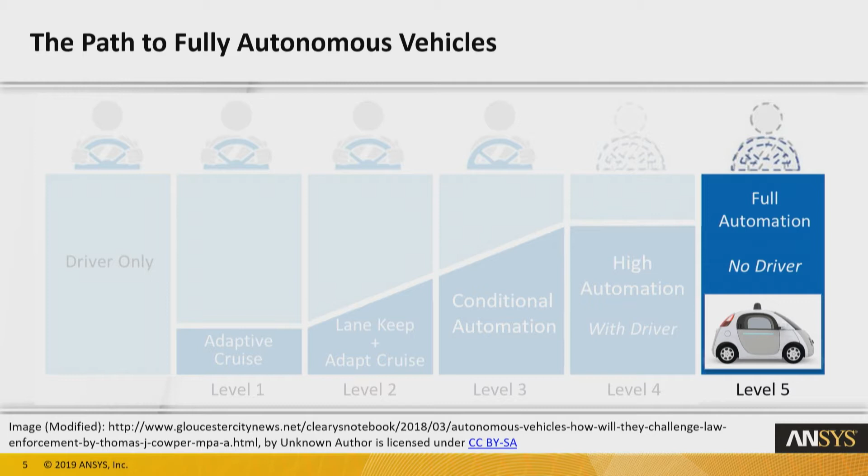Full automation with no driver is what I'm really going to be talking about today, okay? What do we need to do to get to this point? At this point, really, you could imagine having a coffee table in the middle of the car with 4 very comfortable seats, no driver. You say, I want to go to Toronto, get in the car and wait, and when you get there, you get out.

What do we need to do to make this a reality? To make it a reality that we don't need a driver in the vehicle? Well, what we need to do is understand what the driver does, all right? And the observation to be made here is that certainly there's an environment in which the autonomous vehicle is driving. That's a really important piece of the puzzle.

Then we get into a driver control loop. That driver control loop contains 3 main pieces. One related to perception: the autonomous vehicle needs to be able to assess what's going on around itself. The next main component is motion planning, so the vehicle needs to assess what's going on and decide what to do. And the last thing is that it needs to execute whatever it wants in terms of motion with the various systems in the vehicle.

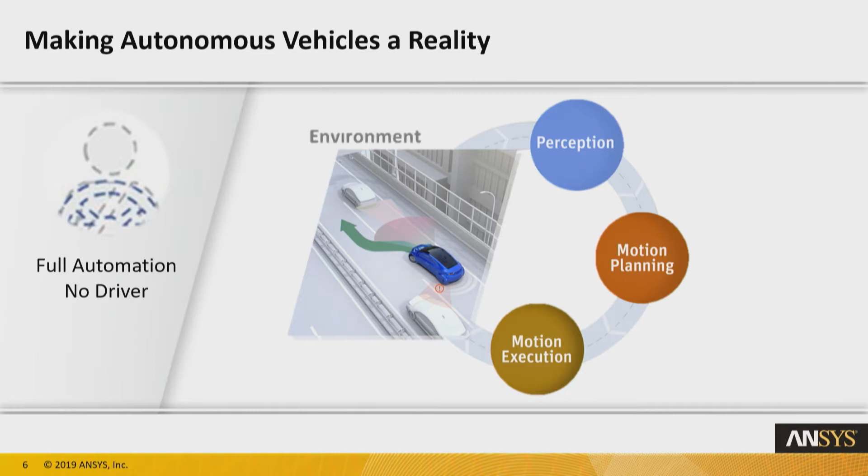So the equivalent of what you guys would do is you decide you want to go off the highway, based on perceiving that the lane is coming up and you can go off the highway. You decide you want to go off the highway, then you turn the steering wheel, take your foot off the gas, maybe you have to brake. That's the motion execution part. It's that last stage.

Obviously, our vehicles need to change pretty substantially in order to pull this off. And there are two main changes that will take place. The first one is the introduction of a lot of new hardware.

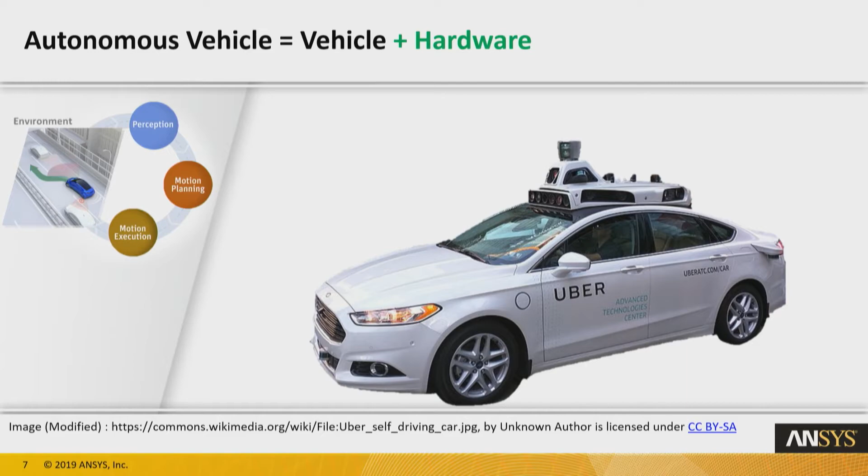We have LiDAR and Radar. LiDAR is laser or light-based detection and ranging technology. And essentially what this technology is doing is it's sensing the existence of various objects, and by processing that signal, it's able to figure out, is it coming towards me, is it going away, etc. Radar is a complementary system in that it provides another way of observing roughly the same kinds of things. In this case, it's not using light or lasers, it's using radio signals. Both of those are bouncing signals off of various things in the surroundings and reading the signals that come back.

Simply knowing that there's an object in front of you is a great thing to make sure you don't hit it. But as these autonomous vehicles are driving around in the environment, they're going to need to be able to assess what color the various traffic lights are. They'll need to read the signs that we see and read every day. Is this a one-way street? Is this a right turn only lane, etc.? That's where cameras come into play, becoming a really important piece of the puzzle to augment the detection and ranging technology.

The last hardware system that I'm going to talk about today, and of course there are others, but I'll focus on these three, is all of the electronics that are needed to integrate all of this into the overall autonomous vehicle package.

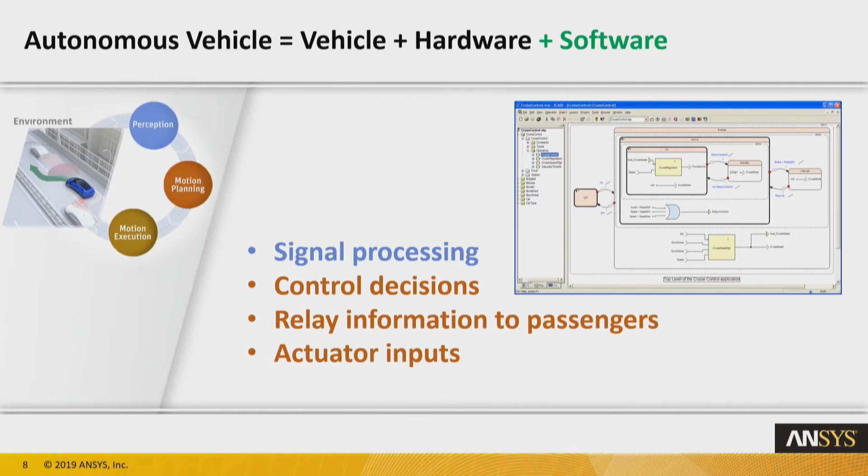In the motion planning stage, there are three pieces that I want to highlight in terms of the software and what it has to deliver. The first, and probably the most important, is making control decisions. This is deciding, do I go off the highway, or if there's the potential for a collision to occur, what am I going to do to avoid it? A lot of information needs to get relayed to the passengers inside of the vehicle. And the last thing the control system needs to do is, knowing what needs to happen in terms of the motion, generate the actuator inputs, the inputs to the motion system itself.

The motion system and executing the motion that came out of motion planning is really down to the vehicle and vehicle component dynamics. So there's software that's related to having the vehicle understand how it itself is going to respond to various inputs.

I'd be remiss if I didn't mention artificial intelligence as well. Deep learning is an absolutely critical part of both signal processing and the control decision process. The thing to understand here is that it doesn't matter how many possible combinations we as software developers could come up with for recognizing a car, a truck, a tree, or a pedestrian, or deciding what to do in different conditions. We can't possibly conceive of all the scenarios that could come up. That's where something like deep learning becomes an essential piece of the puzzle, helping to round out all of the different scenarios that could take place.

I've introduced in the last two slides two major sets of changes that need to take place. And it's conceivable that these things aren't going to work perfectly, especially when we integrate them all together right out of the gate. So there's no question that a lot of time needs to be spent thinking about how we demonstrate the safety of these new autonomous vehicles. In fact, that is absolutely the most critical thing. The technology, we can work on that, but widespread adoption is absolutely contingent upon us demonstrating that these autonomous vehicles are actually safe.

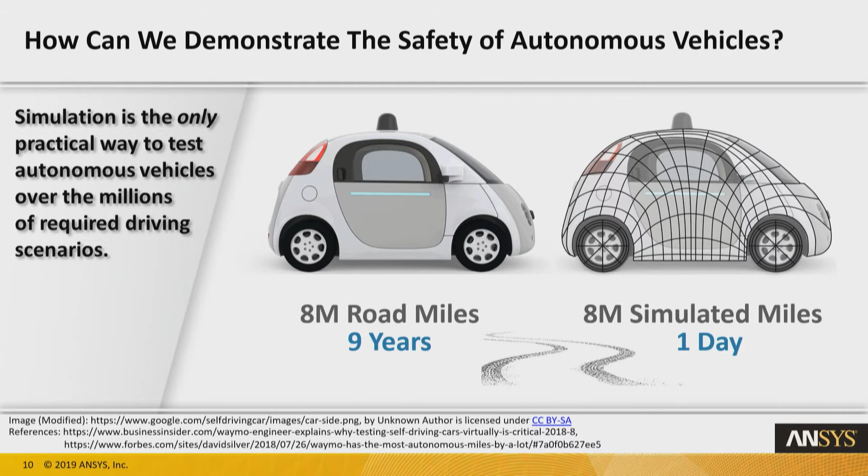It confirms also that simulation is absolutely the only way that's practical to validate autonomous vehicles over the millions of scenarios that need to be tested.

This begs the question then, what does this simulation actually look like? It's not really taking the car and drawing a grid on it. There's a lot more to it. So what does that actually look like?

This is autonomous vehicle testing software, simulation software. On the left-hand side, we see the environment that the simulated autonomous vehicle is going to be driven in. There's a road plan, we see the vehicle in front, other vehicles, street lights, and buildings around it, because that's truly what the environment looks like. These vehicles are driving in environments like that.

In the middle right, we see some feedback regarding the perception, the sensors. This would, for example, be some of the feedback obtained from the LiDAR system or the radar system, then signal processed and shown here.

In the bottom right, we get into the control system, the motion planning. The motion planning for the simulation I'm about to show has two parts: an adaptive cruise control that sets a speed and keeps us a certain distance from the car in front, and obstacle avoidance, where we'll see an obstacle run out in front partway through the simulation. The last thing to note is that part of the software relays what's going on to the passengers, no longer drivers, inside the vehicle. This is an integral part of the actual simulation as well.

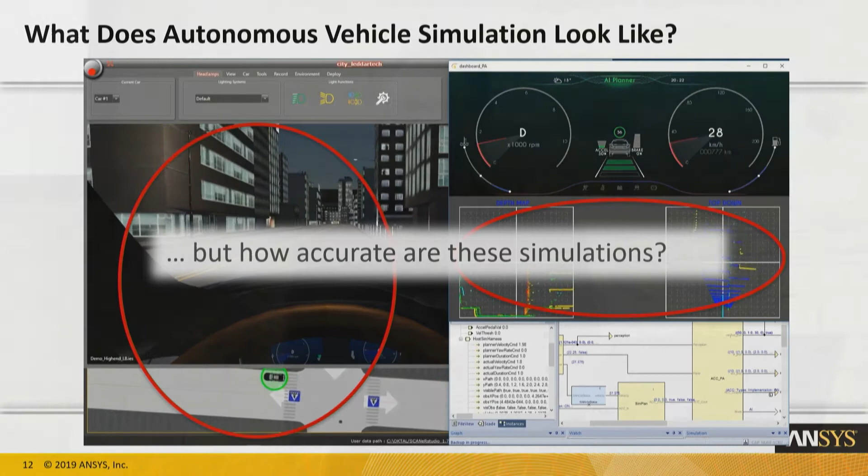A few minutes ago, I said simulations are absolutely crucial to pulling off testing of autonomous vehicles. But we need to make sure the simulations themselves are accurate. We're using computational models to represent the environment where these autonomous vehicle simulations are taking place. We're also using models to simulate the sensors, perceptions, and signal processing going on behind the scenes. If those models are not accurate, then all of this falls apart. We get no value out of it. In fact, it's probably detrimental. So we really need to make sure the models we're using in the simulations are as accurate as they can be.

This lets me get into simulation of the environment and simulation of the sensory and perception systems inside of autonomous vehicles. So it's not just simulating the whole vehicle, it's also being able to simulate the components, to generate the models, to allow us to simulate the whole vehicle and deliver autonomous vehicles in a reasonable timeframe.

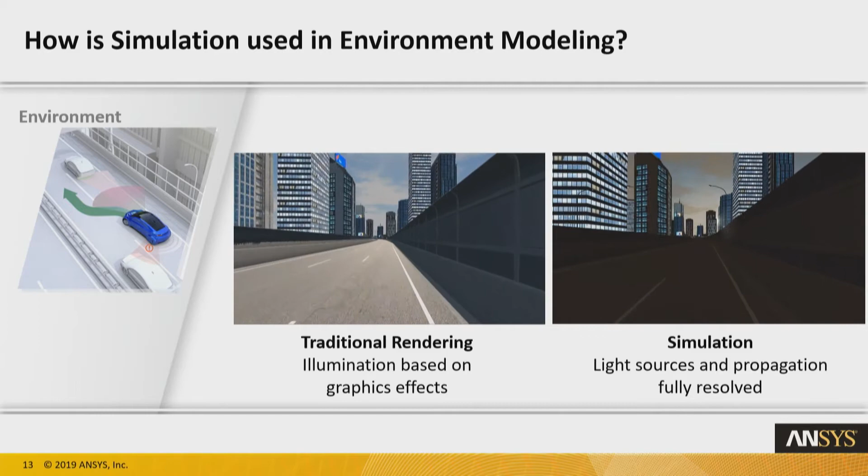And when we're talking about safety and using simulation, we really want it to be a lot better. The video on the right runs simultaneously, taken at a more difficult time of day, either dawn or dusk, where there can be a lot of weird lighting, reflections, etc. Here we're actually simulating the source of light, the sun in the background, the reflections coming off the building windows, the contrast that exists as light shines through small gaps in the environment, and the material properties themselves of the road, the glass, the structures. The light reflects and interacts with all of those materials, and we need to capture that to come up with very accurate representations of the environment.

I'll up the stakes a little bit here. Driving on a highway, midday, dawn, dusk, no other cars on the road, no pedestrians - not so hard. But what happens if we get into an urban environment? I'm going to run this clip - same kind of thing, more traditional rendering on the left-hand side and proper light simulation on the right-hand side. I'll run this clip twice.

The first time, what I would like you to do, especially if you're a driver, is look for the things that might trip you up, especially on the right-hand side. That simulated light propagation is going to hopefully show you the things that you might recognize as having caused problems for you as a driver. I'll run the clip through again at the end, a second time, and highlight those things for you.

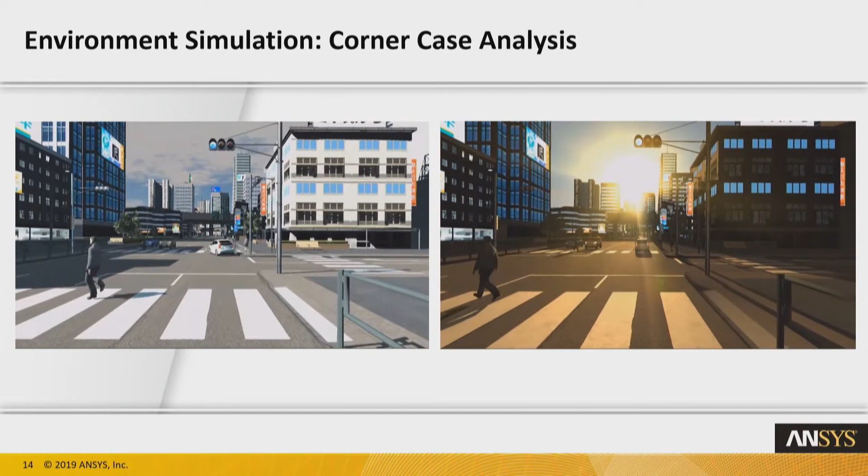So we drive a little bit further ahead. Notice on the left-hand side, that white car in front is pretty easy to see, even with the shadows. But on the right-hand side, because of the contrast, not so easy. And this fellow running out in front of us was really difficult to see - it was because of the backlighting that came about with the sun there. We need to do proper environment simulation, proper real light simulation with all of the features of the environment in place to make the most of this part of simulation.

What I decided to do to help you understand a little bit more about engineering simulation is to give you a couple of live demos, some short live demos. The really important thing here is to understand exactly what users of simulation understand. It's about discovering things you didn't know before.

So I've got my simulation software running in the background, and I'm going to choose to simulate this bracket. I'm sure you guys are familiar with this idea of a bracket. On the left-hand side, there are two mounting points, top and bottom. And on the right-hand side, we have a load, this arrow pulling down. We're interested in seeing what happens when we pull down on this bracket.

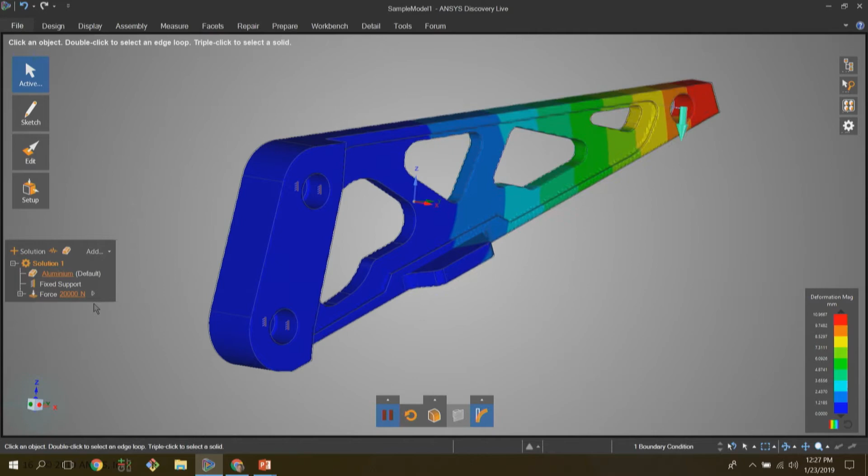And now we see we're really pulling here. Now, is this relevant in the autonomous vehicle context? Yeah, the vehicle itself has all kinds of structural components like this, mounting all of the electronics, mounting the various pieces on the vehicle. We need to be able to see whether these things are going to last, whether they're going to deform, whether there's going to be physical interference between the pieces.

A really interesting thing, and I mentioned discovery before, is that if you think about it, if we apply this load straight down on the end of this bracket, I would think naturally that it should deform straight down. So I'll show you here. Let's look at it end on. We're looking straight down the bracket here, and you see that arrow pulling straight down. But the bracket's not deforming straight down.

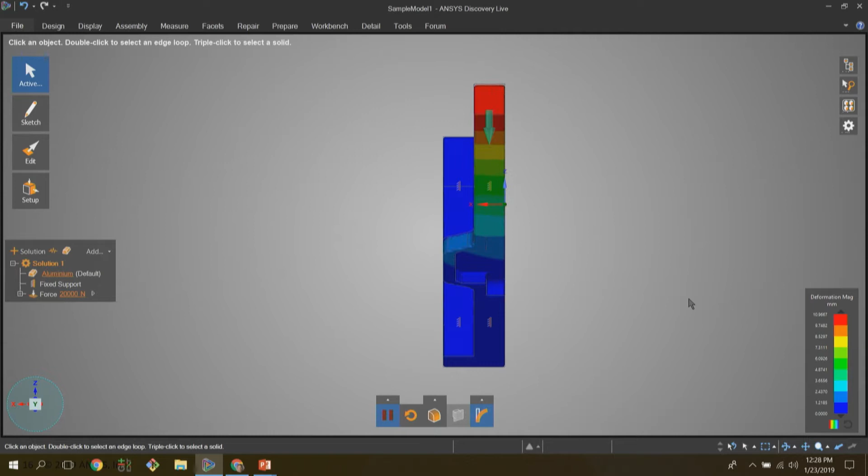It's actually pulling off to the side. I'm pulling straight down, and the bracket is actually deforming off to the side. We just discovered something that we didn't know before. As we look at the simulation and the results, we can see it's because of this asymmetry down here in the bracket itself. I don't know why that's there. Maybe it was there to allow this bracket to fit around or beside some bolt or some nut. But that asymmetry in the actual design is going to introduce something that might not be so intuitive. That's what simulation is useful for.

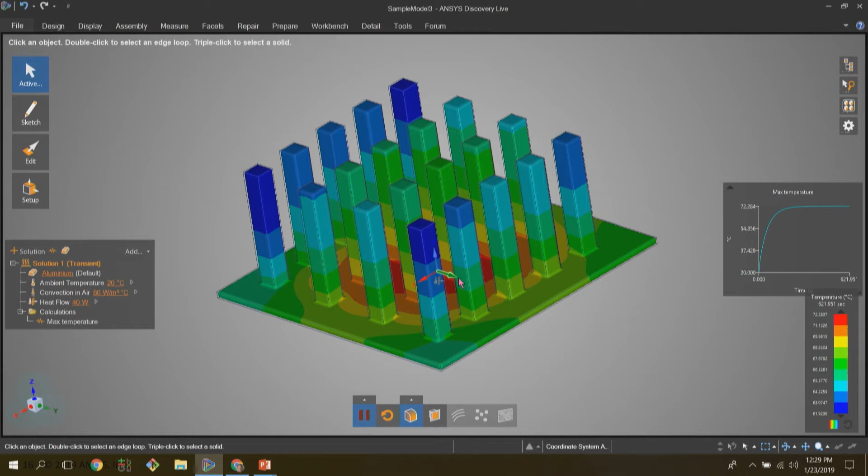Let's look at another example which is also relevant in the context of autonomous vehicles. This is a heat sink. Essentially what happens with heat sinks, why do we use them? It's to get rid of heat. So we've got a lot of electronics components, a lot of chips that are on circuit boards. Those chips go through tremendous amounts of electricity. They get hot. If they get hot, they fail. We need to keep them cool.

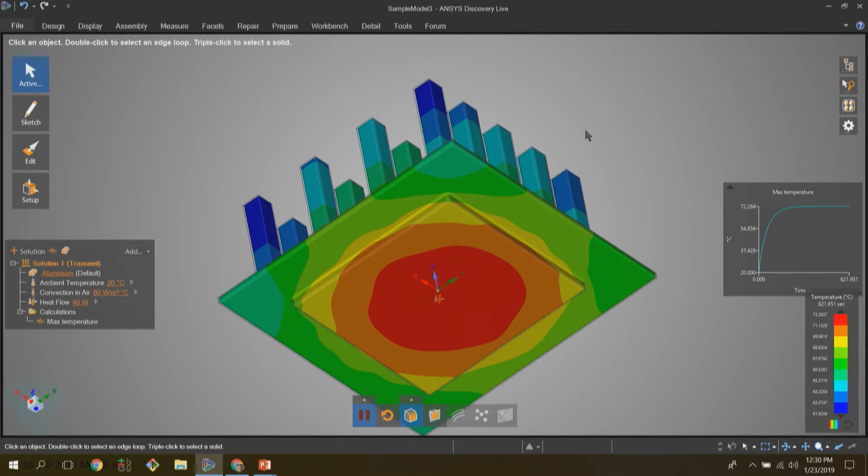We can blow air past them, or what we can do is increase their surface area and blow air past them to help keep them cool. So what happens is that we create heat sinks like this out of a thermally conductive material, like a metal, and we glue them or strap them on top of a chip. So this bottom pad would be glued on top of a chip. And as that chip heats up, we're going to see the temperature distribution, shown in colors here. We'll see the temperature hottest where that contact is made, and where the fins are and where air is blowing past, we'll see the temperature is the coolest.

The maximum temperature, down here, I don't know if you can see it, I'll tell you what it is. It's about 72 degrees Celsius. Now what I want to do is some discovery. So what happens if I change the number of fins from left to right and increase them? I get more surface area. Hopefully the temperature should go down.

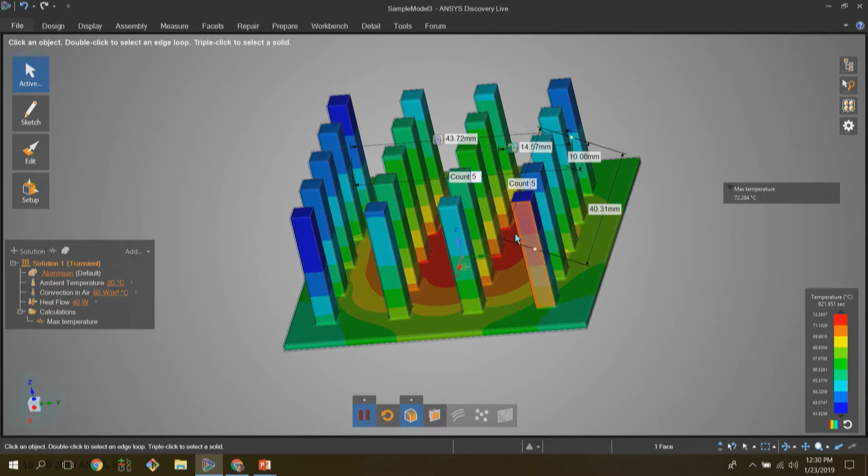So let's add one more fin. There it is. Now the simulation is running again, and what we're hoping to see is that there's not quite as much red. The temperatures drop down, and indeed, if I look on the right, the temperature dropped from 72 degrees down to about 65 degrees. That was a good design change.

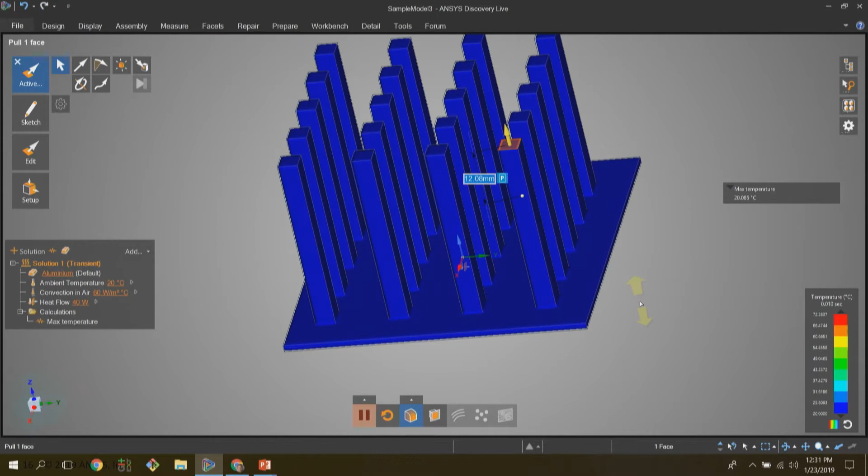Another alternative would be to say, let's start at the beginning again and increase the area where the heat transfer can take place by grabbing the top of one of these and pulling it out. Let's make these fins longer. And if we do that, again, what we're hoping is that we don't end up with 72 degrees. We hope that we end up with something less. So more blue, less red. We're down at 63 degrees.

This is what engineers use simulation software for. It's to do what-if analysis. It's to do discovery.

The next thing I'd like to do is look at bad outcomes, these are good outcomes, but it's equally important, perhaps more important, to look at bad outcomes.

I mentioned before that we might strap one of these heat sinks on top of a chip and blow air past it with fans. Why do we have to do that? Because we're introducing electronics components in cars, and cars are in the rain, slush, dirt, and oil. You can't have chips and fins hanging out in the open, they'll eventually fail. So you put them in sealed containers. But you don't get a lot of cooling in these closed containers, so you have to introduce fans and heat sinks to circulate the air and cool things down.

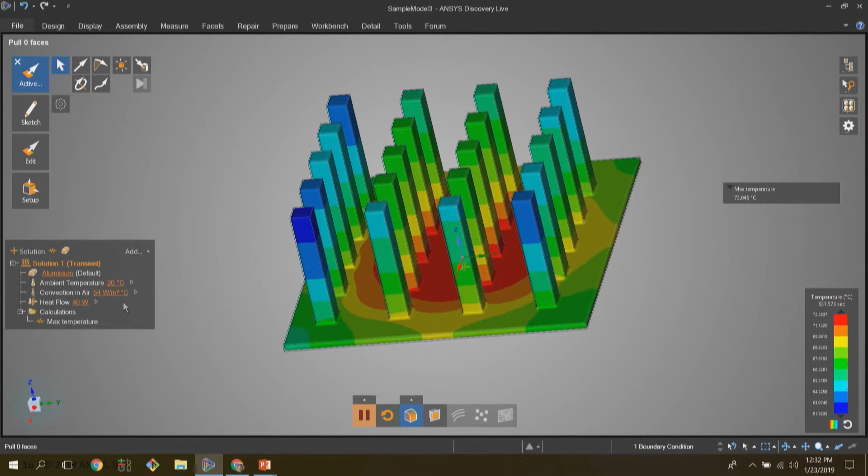What would happen if we had a failure of the fan? This value here is how strong the blowing is, how strong the fan is. Let's say we lost only 10% of the cooling capability. The temperature is no longer 72 degrees, now it's 5 degrees hotter, here we're at 77 degrees. Maybe 75 was a magic number where bad things happen. Maybe it's still okay, maybe it's not. That's if we lost 10% of the cooling.

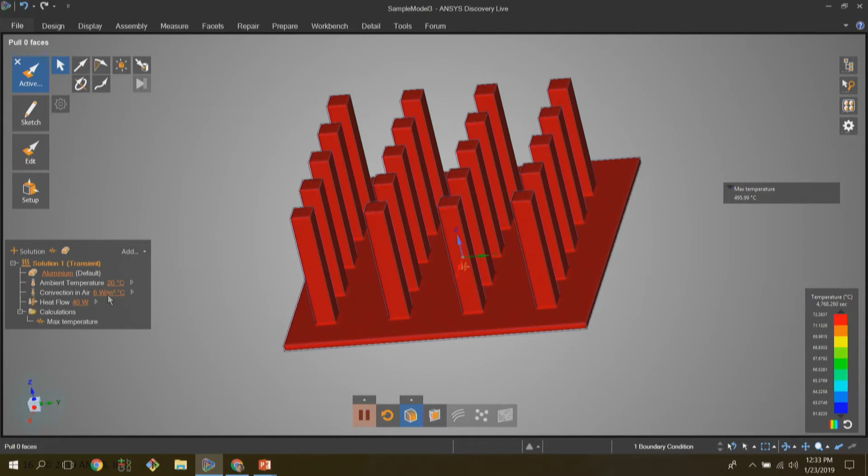If the fan went off entirely, if there's no longer blowing, we're in a situation where natural convection happens at best, which is just hot air circulating around. Let's say we lost 90% of the cooling. It's red, all red, bad things are happening. That number is climbing, we're just under 500 degrees Celsius. This electronics device is toast, literally toast. These are the kinds of things we want to find out long before we ever have autonomous vehicles driving around in a widespread way. We want to know whether they're going to work or not.

So I introduced the idea of the various electronics components and sensors that need to come into play. We talked about needing good models of them to feed into our overall autonomous vehicle simulation. But what about the actual design of the components themselves? If we can design them well using simulation, we can get good models out of those simulations to feed the full autonomous vehicle simulations. Let's take a look at how the simulations I just showed could be useful in designing any one of these components.

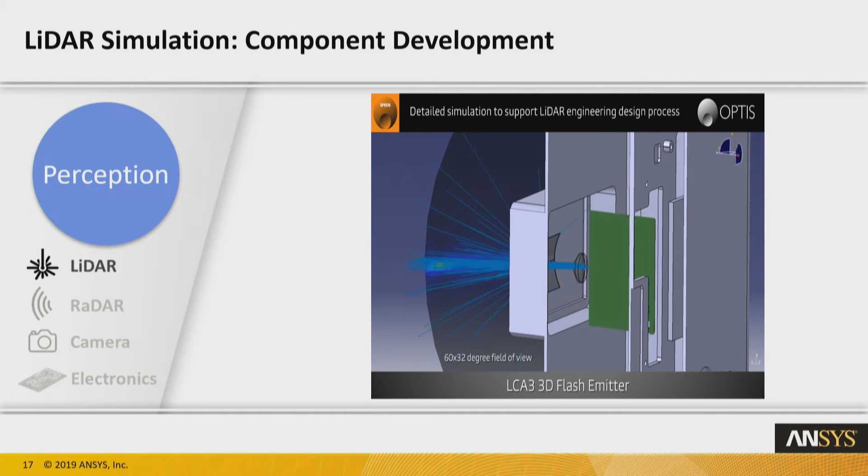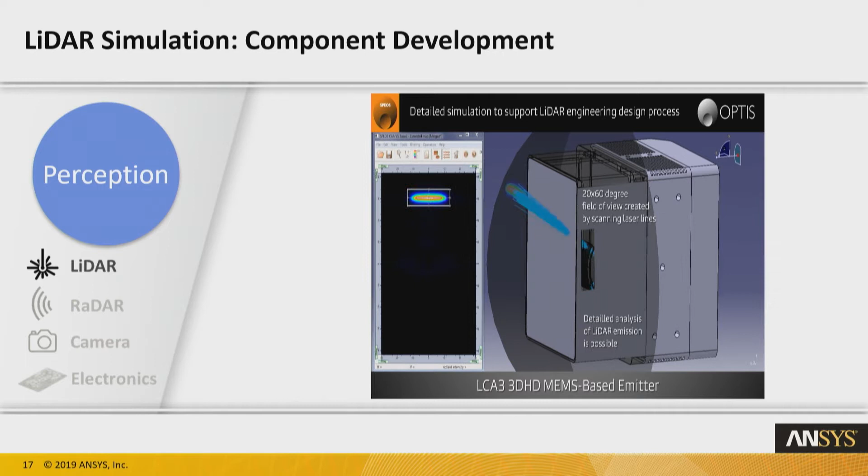I'll start with LiDAR. With LiDAR design, we first look at how the light signal, the laser signal, is projected out into the environment. We want to make sure that signal is very clean and predictable. We're firing a laser, scanning left to right, top to bottom, and we want a very nice, predictable signal going out. There's the scan pattern, and I'd say it's very predictable. If it was some random set of points, we wouldn't be able to take a lot from it.

Once we have the LiDAR component itself, we want to introduce it into the autonomous vehicle with a balance of form and function. Of course, form means we don't want these things strapped on like I showed in the earlier slide, we want them hidden away in the vehicle in a pleasing way. But from a functional perspective, there are trade-offs to be made, and it's a balance of the two.

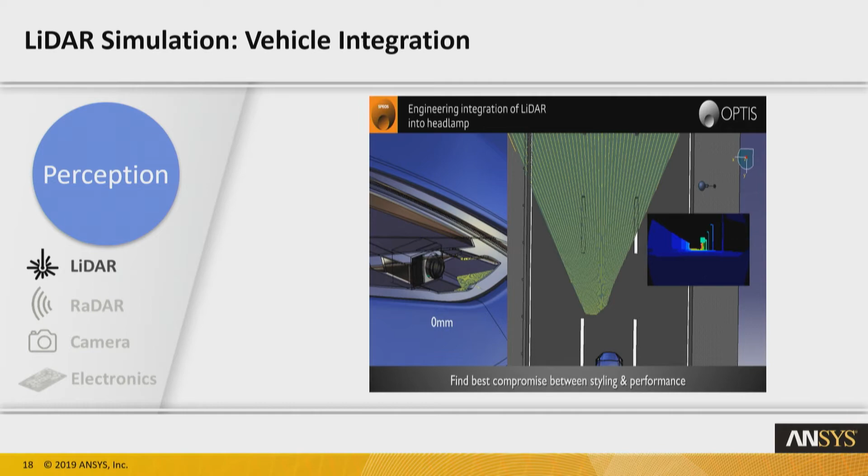So what's happening as I run through this analysis is we've got a LiDAR placed inside of a headlight, and as we move it from the front of the headlight, very close to the outside, further back, the field of view, that green ray pattern, changes. Here you can see on the right-hand side what it actually sees from the environment: there's a wall on the left side, and something off in the distance, some light posts shown in light blue. As we move that LiDAR fore and aft, we're getting good feedback on the balance of form and function. Maybe it doesn't matter, maybe it does matter in terms of where it's ultimately placed and how pleasing it is.

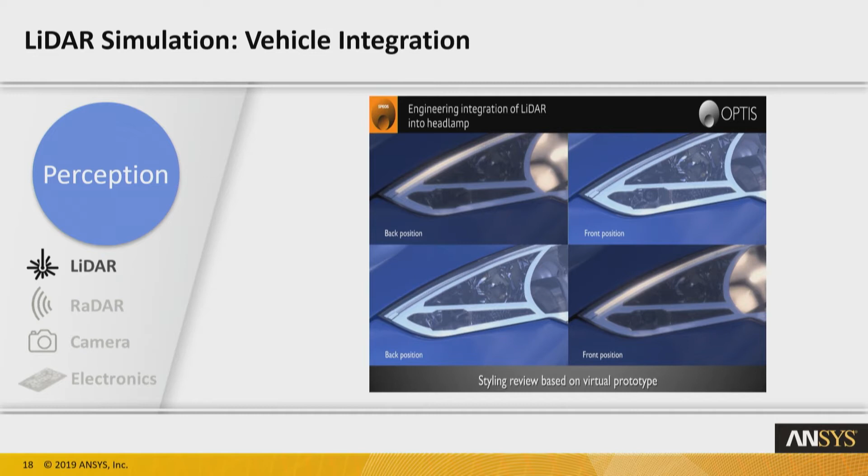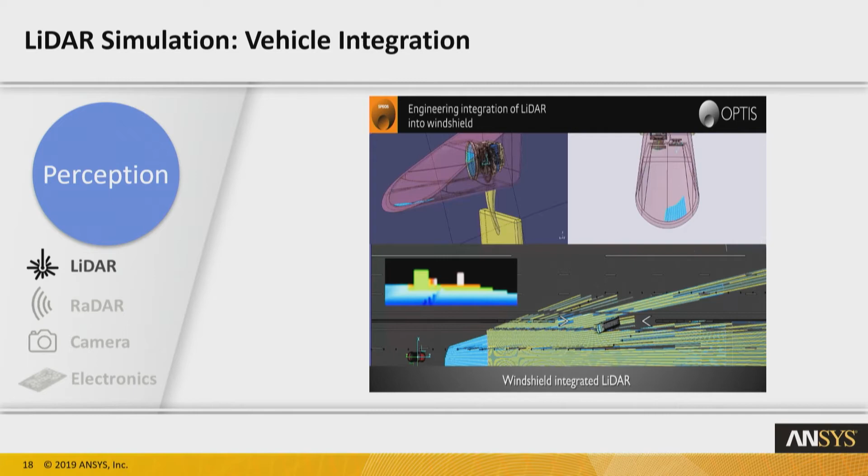We could take the LiDAR, and instead of putting it up by the headlights, we could put it up by the rear view mirror. So here we have an emitter and a receiver, and we're tipping the LiDAR up and down, and we're seeing how far we can see, and what happens when we tip it down. Well, there's interference from the actual housing around the LiDAR. So what do we do? Do we change the position of the LiDAR? Do we change the housing, maybe flare it out a little bit? These are the design decisions we can make after discovering this.

What can we do about it? Well, the good thing is we can change the pigments in the paint, right? And by doing so, we can actually get the return signal. We could change the frequencies at which the LiDAR laser operates. That might help, might not help. Maybe we do have to change the paint. Maybe we don't have to change the paint. But at least we know what we're not going to see if we proceed without having a test like this.

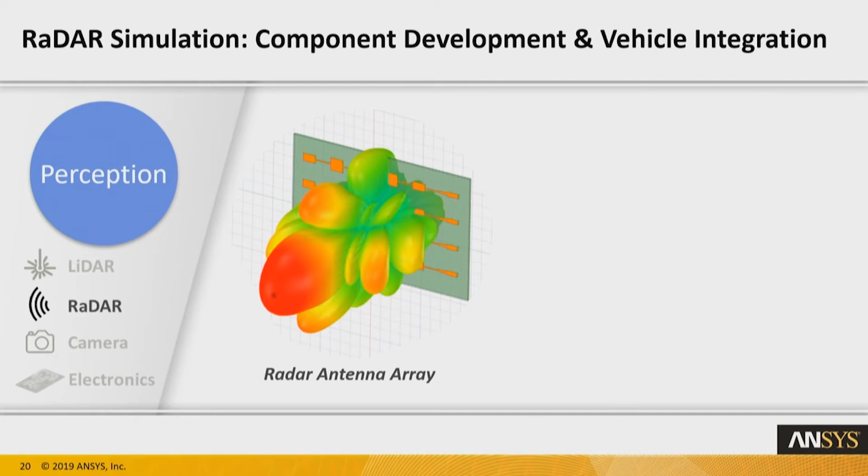Radar works in a similar way. Here, we have the ability to design radar antenna arrays. That plate in the background is actually an example of a radar antenna array. What it's doing is sending out radio signals, and the pattern you see, that lobed pattern, is showing you the relative strength—how big or how long those things are in the coloring—and also the various directions that have strong signals sent out.

By changing the antenna array, we can actually change the radar signal and customize it for various applications. If, for example, we integrate that radar antenna into a bumper for something like parking assist, maybe we want a flatter signal, right? We're not trying to see objects far away, we're trying to see objects close by. The balance of form and function comes into play again here.

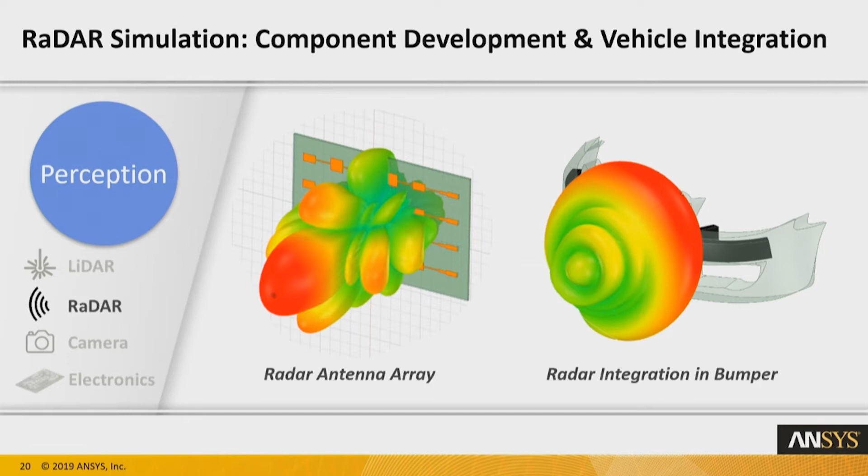If we mount that radar antenna on the outside in plain view with no obstructions in front of it, fantastic—that is the signal it's going to send out, and we'll be able to do a good job processing the signal that comes back. The problem is that I wouldn't want a big radar antenna array hanging off the front of my car. Instead, I'd want it hidden in the bumper.

There's a big problem with that, because if you put a bumper in front of the radar antenna, this is the signal that goes out. It's a lot messier than the other signal I had shown you before. If it's messier on the way out, the return signal is going to be messier. We just made our lives a lot harder in terms of being able to detect what that return signal is, and our processing afterwards got a lot harder.

So being able to simulate not just how we need to design the radar antenna to get the distribution and intensities we want, we need to be able to simulate what happens when we put that behind a bumper, what happens to the signal, and then we need to use all of that information in designing the receivers and what happens downstream of that.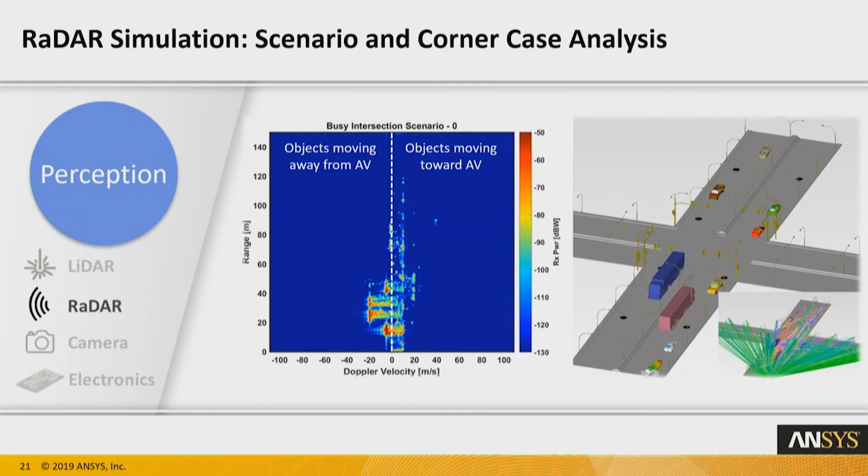So what are some of these things? Let's start interpreting this, because that's what our vehicle has to do—we have to teach our vehicles to do this. You see that vertical line of signals: all of those things are moving at about 10 meters per second toward the vehicle, at varying distances away. Those things are probably the street lights, and it's probably telling us that we're moving at about 10 meters per second relative to them.

The first and really dominant blip we see is that white car right in front of us. It's on the left-hand side, so it's moving away from us, going a little faster than we are, and it's very close to us, at the bottom of the screen. That pink truck is actually further away from us. The radar confirms that, and because it's more off to the left, we see it's going significantly faster than we are, so we should expect it to pull away when I run the animation.

The blue truck, we see it on the right-hand side. Notice that signal is not very strong, and the reason is because it's partially obstructed by the pink truck. So as we're designing these radar systems and signal processing software, we need to learn that's what's going to happen—we need to take all of that into consideration.

Finally, the last thing I'll highlight, and this is the one I want you to watch because that's where we get into some interesting edge case situations, is this brown vehicle. It's way off in the distance, a fairly faint blip. We see it's close to 90 meters away from us, and it's coming towards us rather quickly at about 40 meters per second.

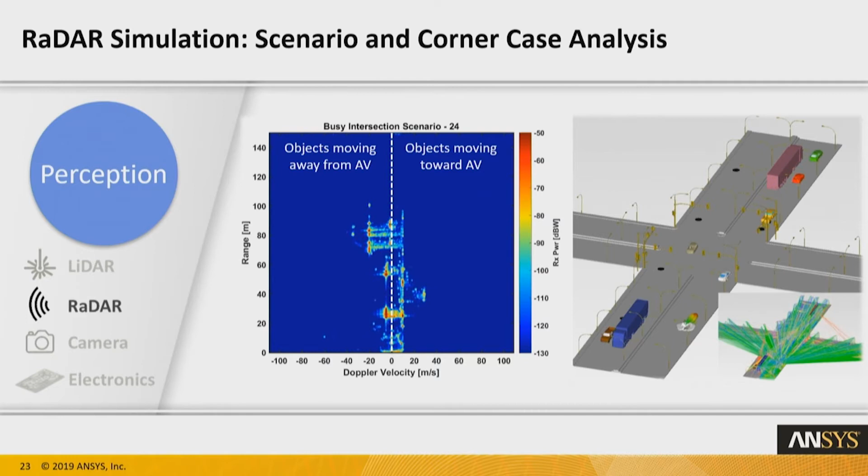Here, if I run that animation, I want you to watch that blip. That was the brown vehicle right here. The interesting thing is as it tucks behind that blue truck, look what happens—it disappears. This is helping us understand the kinds of things we need to watch out for. When is radar going to be helpful? When is radar not going to be helpful? Do we need to understand what kind of object that is and make a record of it? Because if it disappears, where did it go? It's not that it truly just disappeared—it's still there, but we're not tracking it with this particular system.

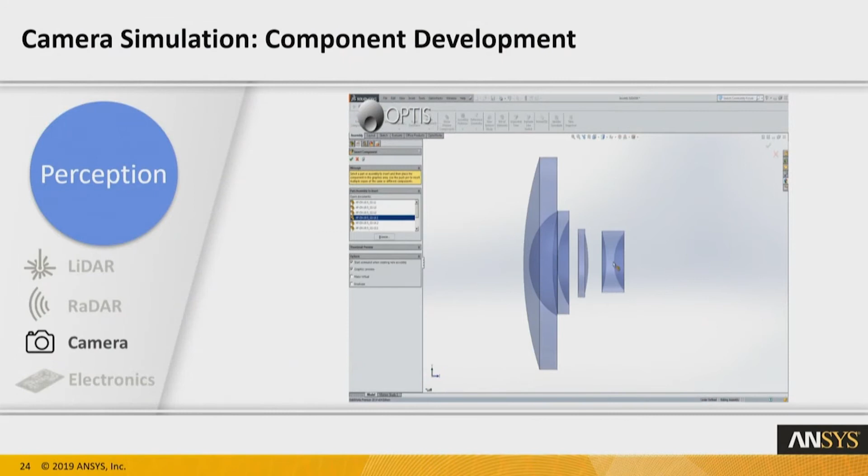I mentioned before we can use simulation in the design of cameras, and I'd like to walk through that as well. In this simulation software, we're going through and selecting different kinds of lens elements, different shapes, different materials. We're stacking them so we get the right optical behavior, mounting it inside of a camera housing itself. Then we go on to test what actually happens as different light signals propagate through the actual camera hardware.

So we have some upstream signal, and we're interested in watching what happens to that signal from the outside world as it runs through the actual lens system and onto the receiver, onto the element at the back. Things we're checking for: overall sensitivity, noise reduction or amplification. You know that if you have a digital camera, or any camera, and you take certain kinds of photos with a poor quality lens, you don't get very good outcomes. So this helps us design what kinds of camera systems we actually want and need.

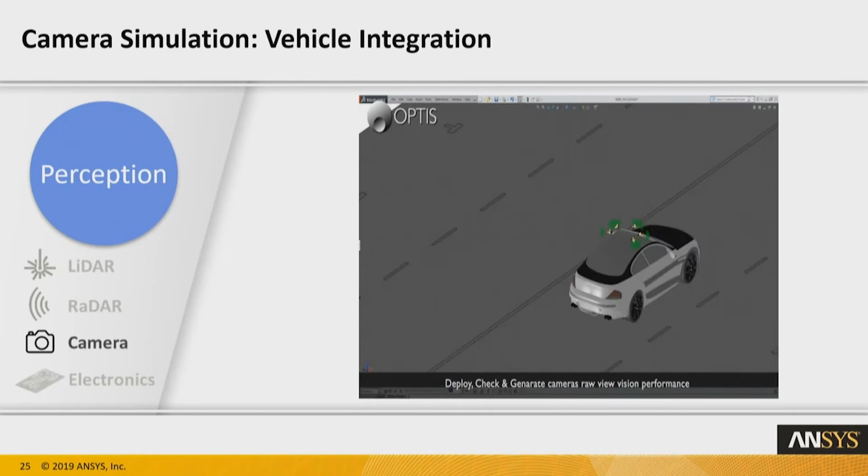Once we have the camera designed, the next step is to put it on top of a car in a certain way. So here we've mounted it on top of a car. The intention is to do a simulation and assessment of what each camera sees, and whether there are any blind spots.

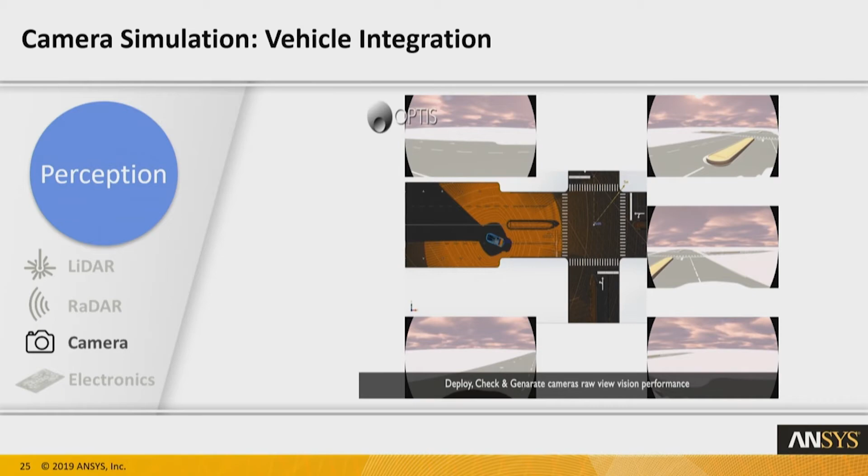This is the interesting thing. The orange rays show us where we actually have good coverage with the cameras - we can see well there. The part that we can't see is black. We have no idea what's going on behind us, or over our shoulder to the left and right, and perhaps what's going on really close to the vehicle in front. This is blind spot.

This is exactly the kind of thing we have to worry about as we drive. So by introducing cameras and models of cameras and doing simulations, we can understand what the actual blind spots are going to be in real autonomous vehicle applications.

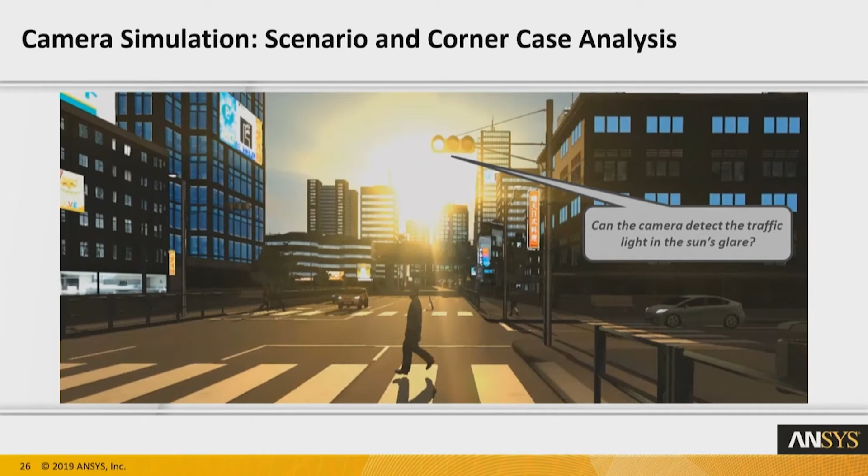I mentioned before, if we made a poor selection of optical components in our cameras, we might not get a very good outcome. This is something you saw earlier. If we had selected particularly poor optical components, it's conceivable that this glare would have become so significant that we would not have been able to see the colors, or even the signal light itself, for a long period of time. We need optical components that allow us to see different things very well, even in difficult visual environments.

What kinds of things are we simulating for that path? Well, those traces have various signals going through - pulses of electricity. We need to ensure the fidelity of those signals is maintained as the signal propagates through the wire path, or through the trace itself. There's also a certain amount of power that needs to be maintained as part of the signal, and we need to assess whether that power is attenuated because of the path through the various traces on the circuit board.

Electromigration is another really insidious thing - it was great, I got to learn about this as part of preparing. Electromigration happens when you fire electrons through these paths and they hit atoms of the metal. They actually scatter - the momentum of the electrons scatters out the metal. What ends up happening is you can introduce short circuits, or open circuits because of that, which is particularly detrimental if your system depends heavily on these electrical signals.

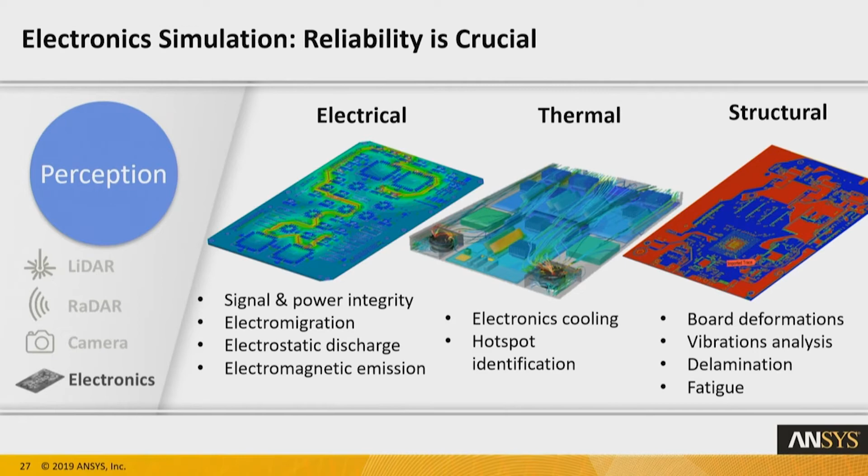All of these things are exacerbated because of thermal effects. I mentioned cooling as a really important piece of the puzzle - we need to keep that in mind, and simulation is critically important for that. Not to mention the vibration that goes on as we're driving this vehicle through town - all of those vibrations can have structural effects on the circuit boards themselves, and can lead to failures in that context as well.

I started the talk saying that simulation was a critical piece of developing autonomous vehicles. The truth is, it's not just simulation. Whenever someone says simulation is important, simulation is fantastic, ask the question: how accurate is it? It's actually physically accurate simulation that's critically important.

Global car makers have already factored simulation into their plans for developing autonomous vehicles. In doing some research, I came up with feedback from the 11 largest automakers on when they think autonomous vehicles will be available. Clearly we missed the mark on 2017 and 2018 to a large extent, but that 10-year mark - 2030 - is the latest timeframe any of these manufacturers has come up with.

Let's go back here, back to the very beginning. Autonomous vehicles are going to have a profound impact on our lives - there's no question about it. That revolution has begun. These are the kinds of things we can both look forward to and need to be aware of.

There's no way we're going to pull off all the testing needed to assure ourselves they're safe. In order to do that, we need something other than basic road testing - we need simulation. With simulation, we can do this in a matter of a decade or a few decades worth of time. And again, fundamentally, it's not just simulation - it's physically accurate simulation that's critically important in this adventure. That's it. Thank you.